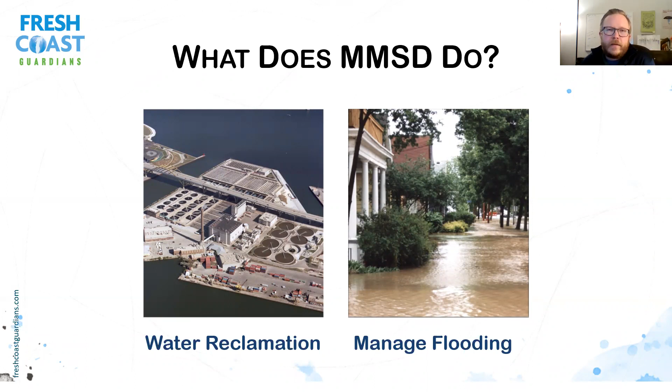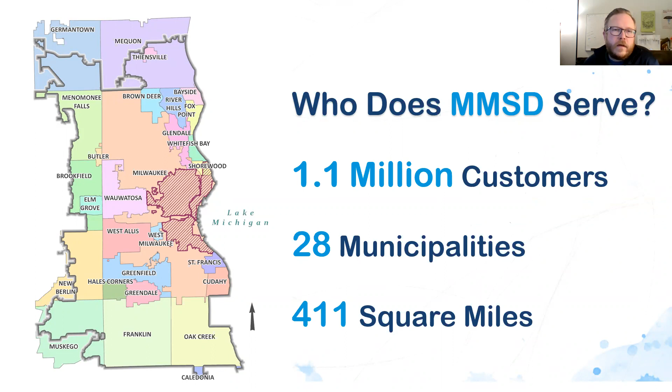We're really world-renowned at how good we are at capturing and cleaning the water. Since 1994, when the deep tunnel went online, we've captured and cleaned 98.5% of the water that's come to us. For perspective, the EPA's goal is 85% capture and clean, so we are well above that. Sadly, many cities in the United States are somewhere around 60 or 65 percent and in much worse shape than us. So this 98.5% is great, and we're really world renowned in that respect, but we'd much rather be closer to 100%. And that's where we'll talk to you about how you can be part of that solution as well.

So first, we're just going to talk about our area, what kind of happens here, and why stormwater and water that falls here is becoming a larger issue, especially with climate change. As you know, we get a lot of rain, sleet, and snow in Milwaukee each year, and that number is continuing to rise each year with climate change.

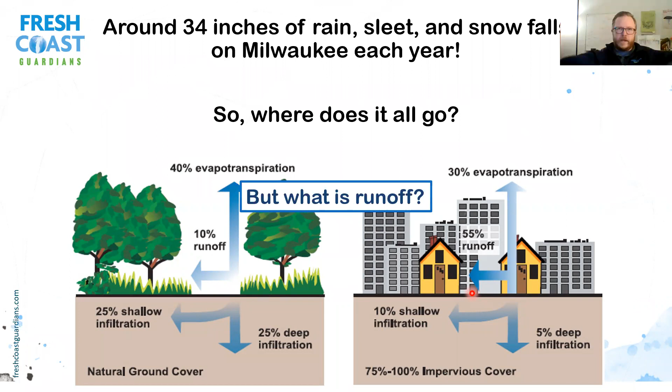That 34 inches that we get has to go somewhere. Obviously in the natural setting you see here on the left, when water falls like in a forest or a prairie, most of the water either goes down into the ground and gets cleaned or evaporates, and very little actually runs off - about 10%. Now in our more urbanized area like Milwaukee, where we've covered up this natural surface with hard surfaces like our roofs and driveways, very little gets into the ground and less evaporates. More than 5 times as much actually runs off right out into the rivers. So that runoff is that sideways motion of water you see when it rains, going down the street. That's what we're talking about when we're talking about runoff - instead of going down into the ground or evaporating, it's going sideways.

Wetlands are uniquely designed to clean water that comes to them. Before we developed, when it rained, water would slowly soak into the ground, come out into rivers, and move slowly through them, getting cleaned by the wetlands. It was nature's perfect treatment plant, doing a great job of cleaning the water.

We thought we could control water with concrete, putting it in concrete channels, and put a lot of the rivers into pipes. Then we developed, and that has really caused issues with increased runoff because the water doesn't have anywhere else to go.

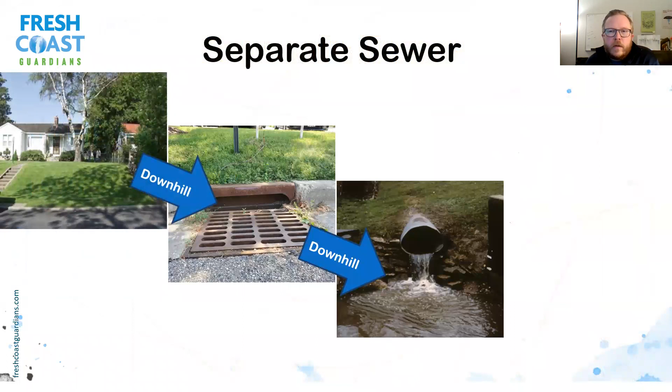When it rains on your lawn and it's saturated and runs, or on your sidewalk, it goes downhill into the street, into storm sewers, which go directly to our rivers and ultimately Lake Michigan, where we play, swim, and also get our drinking water supply.

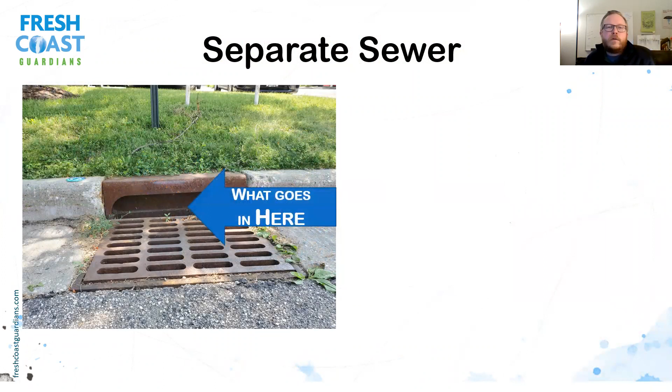So whatever goes in here ends up going directly there, which is our really great resource that we want to protect. It's on the ground, it ends up in our water.

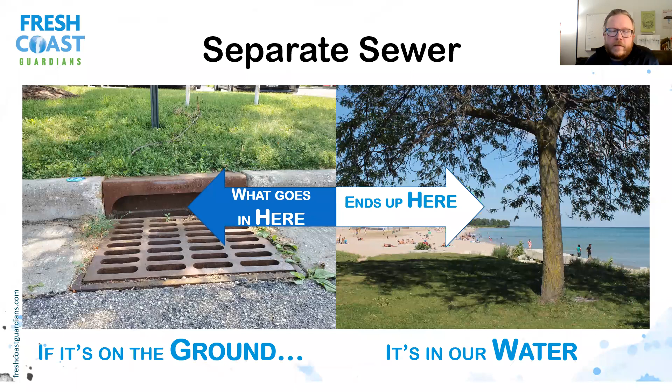Now, what I should have been clear about is that this is the most common way it works in our area—the separate sewer. That's the more modern way of sewers.

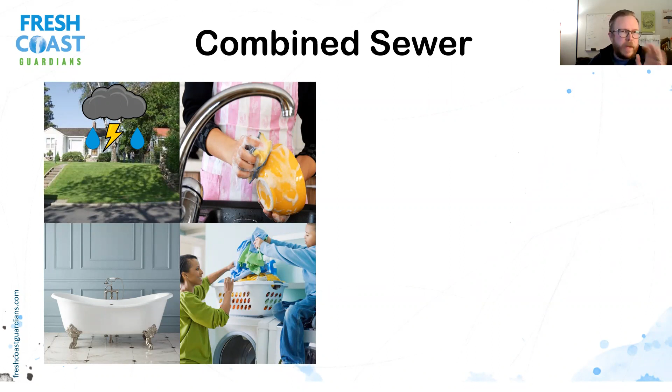There is a small section of our city, Milwaukee and Shorewood, that's in something called the combined sewer. Instead of a separate pipe that goes right to the river with rainwater, the rainwater actually goes in with the sewer water, like wastewater, into one pipe. So washing dishes, bathing, laundry, going to the bathroom—all mix with the rainwater and go into one pipe. That same storm sewer pipe mixes with all the stuff.

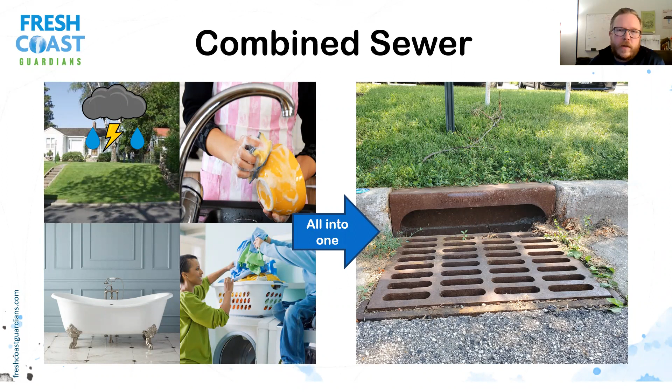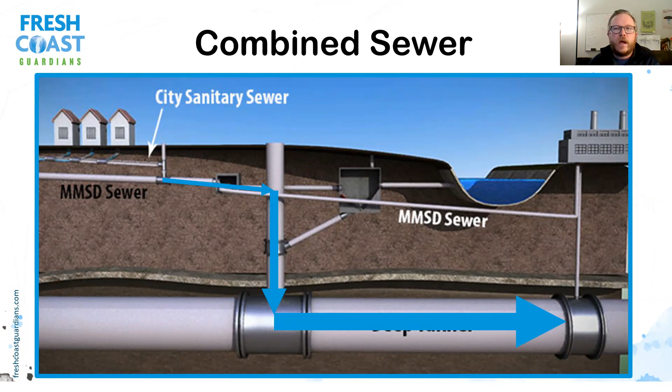That's a smaller area—I'll show you in a second, but it's important to understand. That's where you might have heard of the deep tunnel. The deep tunnel was built as extra storage because when it rains, that section of the sewer system gets overwhelmed. So we can put that extra water into the deep tunnel until the storm passes, then pump it up to treat it.

So where else does the water go? Well, we have sewers, and this is our network here. We own 300 miles of sewers, a nice extensive system that are kind of the big highways of the system. They collect water from the local municipalities who also own sewers—probably the sewer out in your street is owned by the city.

The city system is about 3,000 miles, but another 3,000 miles, probably over that, is owned by you and other homeowners. That pipe between your home and the street, your lateral—if you ever had to roto-root it—is owned by you. In our area, over 3,000 miles of those are privately owned.

I just referenced the combined area—that's this area here in gray or green that I was talking about. That's the combined system, where the rainwater and sewer water mix and go to Jones Island.

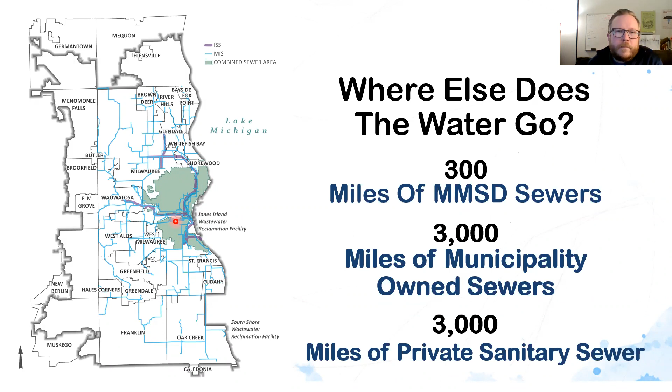So what are some of the consequences? As I mentioned, this water doesn't have a place to go, so it goes sideways. And as we build more and develop more, that increases how much runoff we have.

Well, one of the big problems is the water quickly rushes to the rivers. Some of the rivers we have, I showed you earlier, are in concrete channels where the water gets in there and flows really quickly, causing a health and safety hazard for our community. Many people have unfortunately passed away by trying to jump in these rivers.

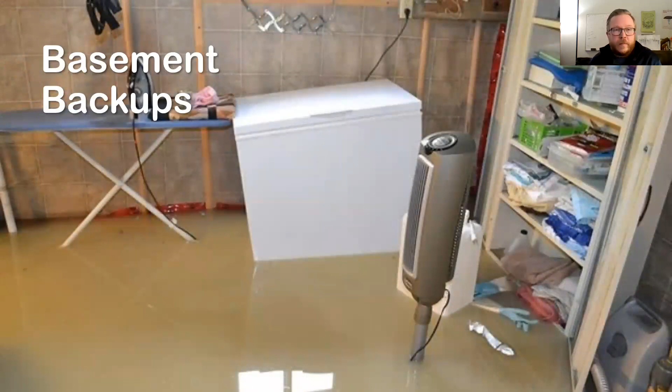Basement backups is another issue. When the sewer system gets overwhelmed too quickly with too much water all at once, you can get basement backups. So those are obviously not a good thing either.

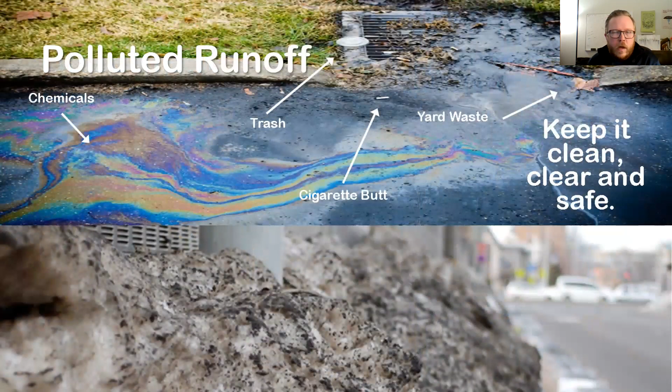Polluted runoff is another big problem. This is actually the number one source of pollution to our waterways, runoff from the streets going directly into the rivers and lakes. In that separate area, anything you see on the ground next to a storm sewer doesn't get cleaned, it goes directly out to the rivers and lake. Just imagine those snowbanks at the end of the season, like right about now, how dirty those are. You can kind of see down here. And imagine that going right out into where we get our drinking water. So not good, and it's the number one source of pollution. We're trying to find ways to make this a better situation than it is.

And lastly, that quick moving water can pick up large things like trees, sediment, and rocks, causing unusual erosion of stream banks that you might have seen along our parkways and things like that. So that's another issue. Okay, that's my part for now.

And I'm gonna pass this on to Lauren to talk about how to make a more resilient home. Thank you very much, Jay. You're welcome. All right, all right.

So taking what we just learned about MMSD, our service area, and what are the consequences, like Jay said, we're going to talk about how you can actually make your home more resilient to help prevent these things. Jay, next slide, please.

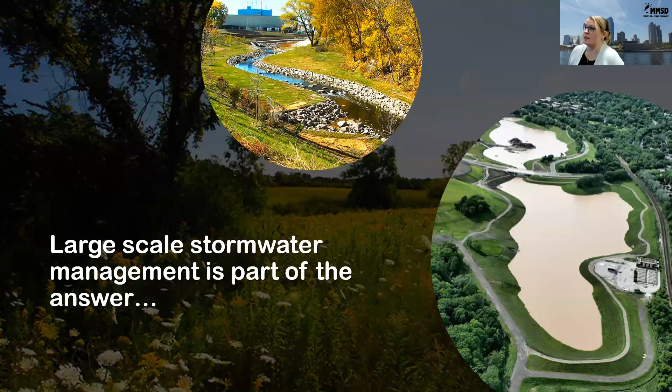Jay touched on this a little bit, but obviously MMSD is contributing to this too. Large-scale stormwater management is a key part of our mission here at MMSD, and something that we do at a watershed scale. These projects are essential for managing large-scale flooding, reducing erosion, improving stream and river health, improving water quality, and reducing demand on our public sewer systems.

Next slide please. You might have seen this coming, but small scale projects are also very key to the success of this. Each practice is key to capturing, cleaning, and keeping that dirty stormwater runoff out of our systems, and from overwhelming our sanitary sewer systems. Jay showed you that map before of what our current southeastern Wisconsin area looks like. In the MMSD service area, over 60 to 70% of our impervious surfaces are on private property. So really the help comes from you, that's where we really need this. There's limited space for these large scale projects, and we really need everyone's help to manage water where it lands.

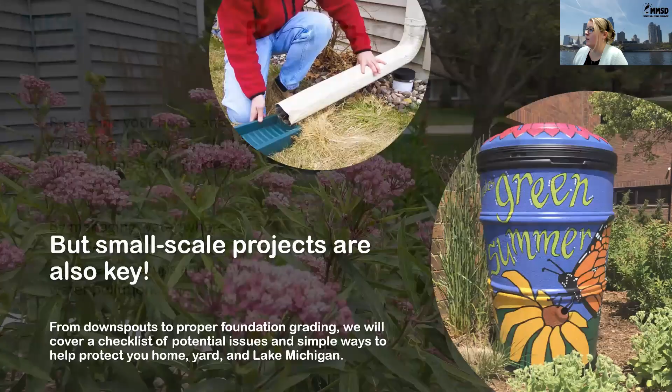So I want to quickly introduce you to our Raincheck program. This was something we rolled out several years ago to help homeowners think of managing their water as a sort of home audit, both inside and out. This checklist is actually on our website, and the format we're going today follows this. We're encouraging homeowners to, a few times a year, go out and really inspect your property and the infrastructure on your property, get to know it. I'd really suggest you do it when it's raining or right after a rain event. That's how you're going to best know where water is moving on your property and see evidence of water inside your home.

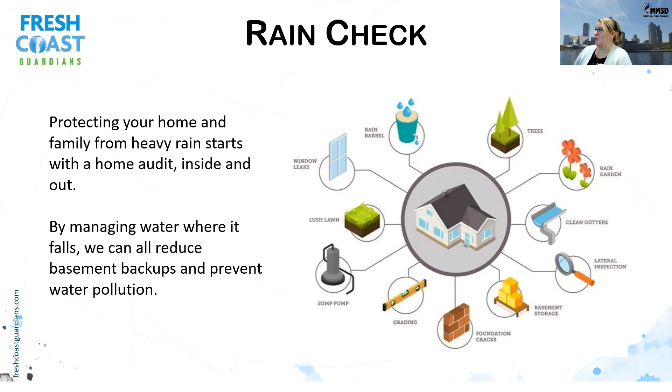Next slide please. The number one priority that we're going to talk about today, there's a lot of great things, but the number one priority for getting water away from your home and reducing the risk of pooling and water seeping into your basement is making sure that the soil and concrete are sloped away from the foundation. This is absolutely key, and something that's actually pretty easy to check.

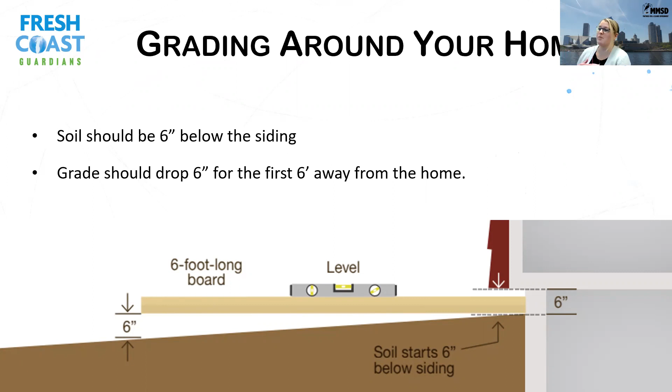I could talk about this a lot more, but I know a lot of people are visual learners like I am, so I'm going to show you a quick video that's going to walk through exactly how to do this on your property. Give us one second here.

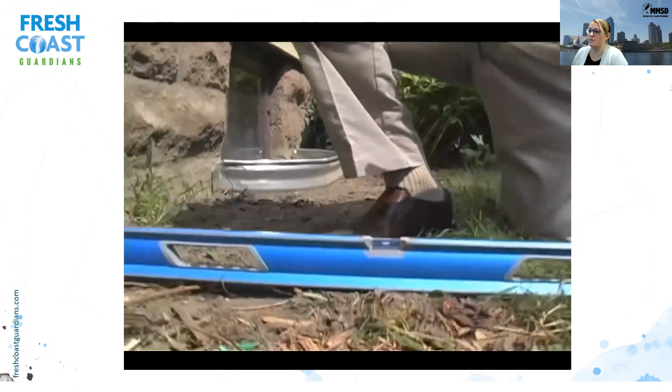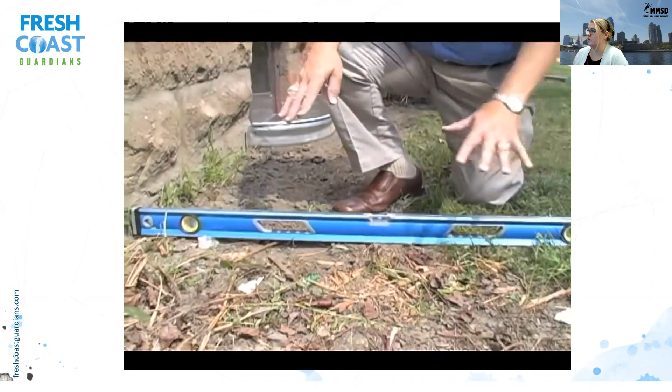The most important thing you can do is keep water away from your house. Whenever it's raining, the water's pouring on your house, it's going to end up someplace. If the ground around your house is pitched toward the house, that means it's just going to funnel it right into the basement. So check the topsoil areas, the planting areas around your house. We put a level down here, and this is just about level. Well, that's not going to help any.

What you're looking for on a ground surface, a soil surface, is a pitch of about 1 inch per foot so water runs away. That means that up here against the wall, it should be about 4 inches higher than it is out at the end of this 4-foot level. And that's what you're looking for.

This means adding soil around the house, build it right up to window wells if necessary. But the point is, make sure that it's pitched away from the house wherever possible. And that means water goes away and not toward your basement.

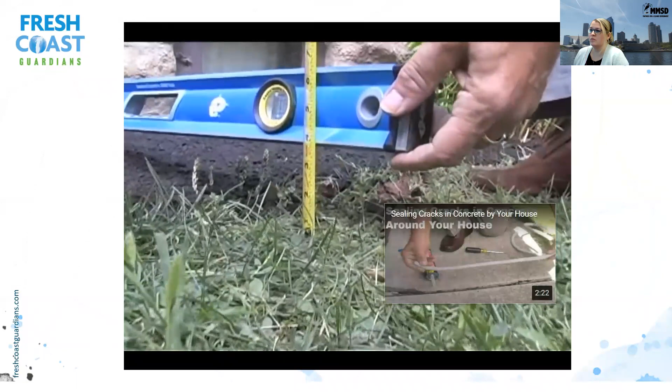Once you've got the dirt around the house raked out, take your level and set it up against the house. Then go to the outside end of the level and lift it up about 4 inches. Now check the bubble in the center of the level. If it's level, that means that you've got a 4-inch pitch over 4 feet, 1 inch per foot. That's exactly what we want.

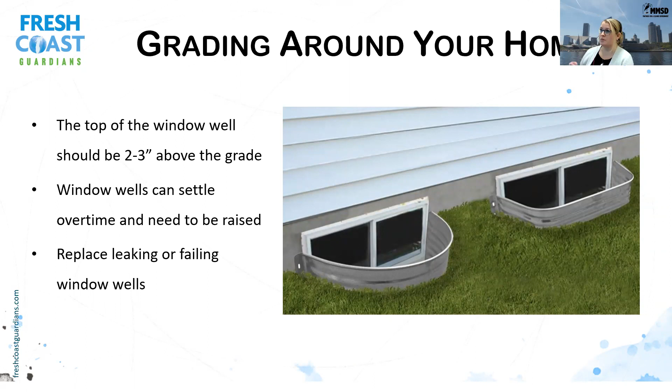So moving inside the home regarding windows, this is a key area where people experience water coming through, and that could be due to shifting of the foundation that has caused cracks there on the frame. It could be due to poor caulking that's just dried out over time and needs to be replaced, or even rotted wood. So this is a good time to do a visual inspection.

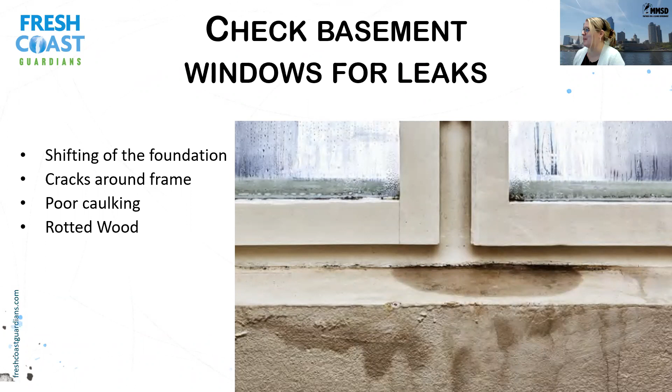Again, I encourage you to go down to your basement during or right after a storm event and look to see if you see any water droplets along there. Maybe you see some moisture on the ground. This would be good evidence that there's water coming in. And again, if it's something as simple as caulking, do that, but it's worth keeping your basement dry. So please replace any failing or seriously leaking windows.

All right, moving on. I would consider this your number 2 priority. We talked about your number 1 priority being proper grading, keeping soil pitched away from your home. Your number 2 priority is maintaining your gutters and your downspouts. These play a really important role in keeping your basement dry, and properly functioning gutters and downspouts direct all of the rain that's coming down on your house and onto your roof away from your foundation and away from your basement.

Some of the common problems that we see in gutters and downspouts are broken, separated, or missing gutters, clogged gutters. If you ever see plants growing in your gutters, you probably have a lot of sediment built up in there that needs to be removed.

Downspouts without extensions, allowing the water to come out of the downspout and immediately start pooling around your foundation. We are going to talk about this more, but you want that to be at least 6 to 10 feet away from your house. And then we've even seen downspouts sloped backwards. It might be obvious, but we really want to make sure that those downspouts are sloping away from your house and not sloping upgrade.

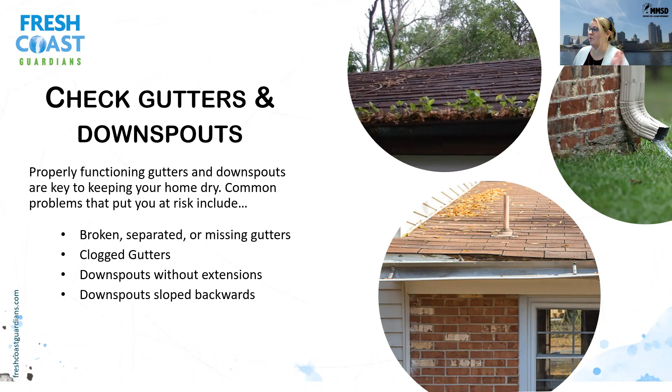So what does proper gutter and downspout maintenance look like? Well, it starts with cleaning your gutters twice a year, ideally in the spring and the fall, and inspecting your gutters and fixing any broken, bent, or separated gutters.

Install your downspout extensions 6 to 10 feet away from your home. I'd encourage you to also look at those connections. A lot of times you're attaching a corrugated plastic piece to an aluminum metal piece, so make sure you're using the right fittings and putting the elbow or downspout into the attachment, because if you do it the other way around, the water will just fall out.

Ensure that your downspouts flow downhill. Right now in winter, especially with spring just around the corner and temperatures starting to go up, clear your downspouts of snow and ice. A lot of times they can get jammed up and there's not a good space for water to safely exit. So go around your house in the next few days and make sure they're free of snow and ice.

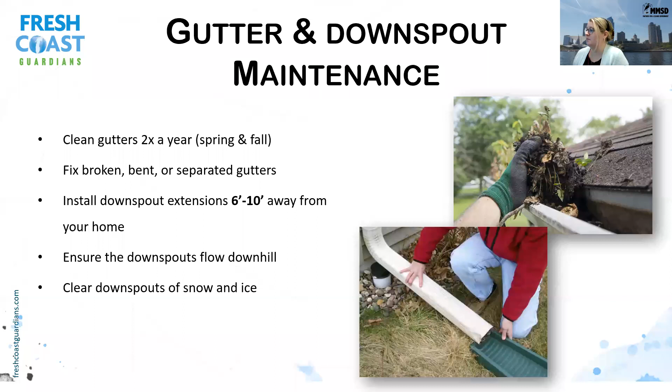The next thing we're going to talk about related to downspouts: if you don't have downspout extensions, it's possible your downspouts are connected to your foundation drains and your sanitary sewer. So why is downspout disconnection important?

During a storm event, if you now have stormwater going out in addition to wastewater, you're putting yourself at risk of a basement backup, and also putting your neighbors at risk. So we highly encourage downspout disconnection.

However, there's one important distinction: whether or not you're in a combined sewer area versus a separate one, and Jay touched on this before. We recommend it in both areas, but you want to make sure you can disconnect safely and have sufficient space to locate that discharge point, at least 6 to 10 feet away from your foundation or basement, with a pervious surface or area that can soak it in, like a lawn or garden, and enough slope to direct discharge away from your home.

Also consider whether it will be a nuisance to your neighbors, or whether that discharge coming out of your downspout could create an icy, unsafe situation. If you're ever unsure, the best plan of action is to call your municipality and ask about downspout disconnection to make sure you can do it safely.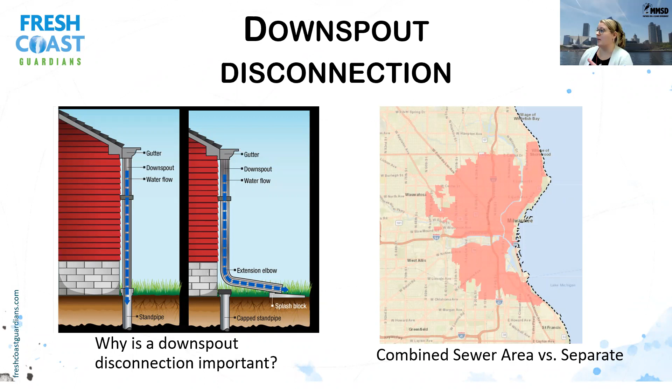All right, so we have a fun little DIY project. If you're saying, that sounds like me, I have ample space to disconnect and I'm ready to do a project, we're going to teach you how to do a downspout disconnect. Step 1 is calling your municipality to find out if you should disconnect. If you're in a separate sewer area, that's less of an issue.

Your next step is to measure 9 inches above the sewer connection and cut it right there with a hacksaw, taking out that bit of your downspout. Then cap the pipe that's connecting to your sewer with a rubber cap and a hose clamp. You can get that at Ace Hardware or other hardware stores.

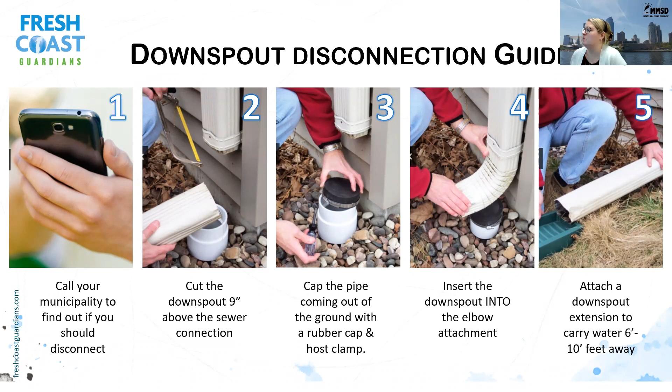The next step is inserting the downspout into the elbow attachment. Again, if you do it the other way around, water will pour out. Lastly, attach a downspout extension to carry that water 6 to 10 feet away from your home. All these instructions are also on our website, along with a lot of other fantastic information about managing water on your property.

Foundation drain disconnection is different from your downspout disconnection. Your foundation drains are a series of pipes along your foundation that collect groundwater and direct it away from your foundation and basement.

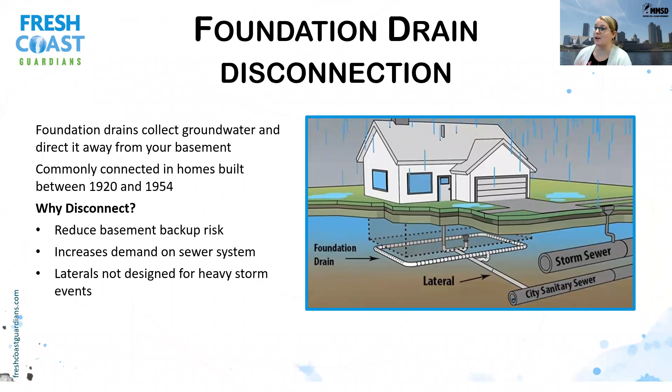In homes built between 1920 and 1954, it's very common to find foundation drains connected to the sanitary sewer lateral. This is a situation where we'd want to disconnect to reduce your risk of a basement backup and reduce that demand on the sewer system. Just a reminder that these laterals are not designed for these heavy storm events.

A lot of people are not aware that their lateral is actually the homeowner's responsibility. When I say lateral, this is the connection that runs from your home and carries the wastewater - all the toilet water you flush, showers, dishes, all that good stuff - and carries it to the main sanitary sewer connection. This picture is an example of a separate sewer connection.

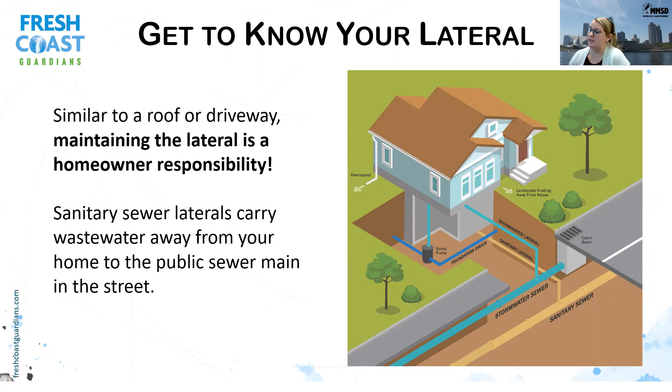And if we were in the combined area, those two pipes, the stormwater and the sanitary, would be combined. Next slide, please. All right, maintain your lateral. So how do I care for this lateral? How do I know that it's in good shape? We're going to start out with 2 rules.

First one is don't pour grease or oils down the drain. This can, even though the water is hot and it may be liquid at that state, once it cools down, it can create solids and massive blocks in your pipe. So never pour grease or oils down the drain, always throw them away.

The next is to only flush the 3 Ps: poop, pee, and paper. I want to emphasize that 'flushable' does not always mean flushable. Anybody's allowed to put that word on their packaging without proving it's actually flushable, so rarely are flushable wipes truly flushable. It's always best to throw them away, because even if it doesn't create a clog in your lateral or in your street, it can create massive problems down the line for your city.

So when is it time to get an inspection? If you're experiencing frequent basement backups to the floor drain, you're seeing debris around your drain during heavy rain events, perhaps you have slow running drains or toilets, or your home is older than 1970 and it's never been inspected, it might be time to consider having your lateral inspected.

This would look like calling a plumber or contractor to come out and do a CCTV, which is a televising of your lateral. During that inspection, they're looking to see if there are any clogs, roots, or cracks in your lateral that might be causing structural issues. Your plumber can point out these issues and discuss repair options with you.

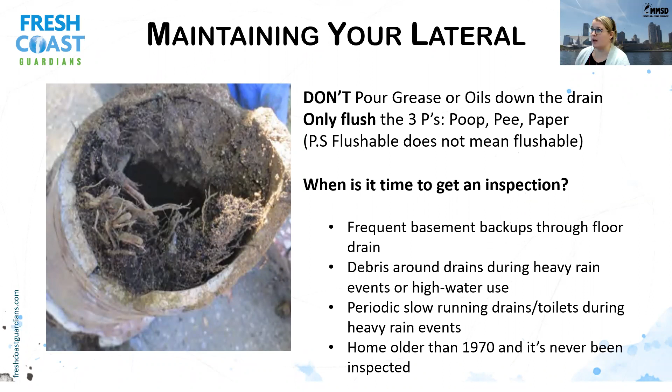All right, lastly, so if you were listening to the last few slides and said, hey, that sounds like something I'm experiencing at my house - I think I need to disconnect my foundation drains, or my drains have been running really slow and I think I might need to get my lateral fixed - I'd like to introduce you to MMSD's new program called Pipecheck.

Pipecheck is a program that provides financial incentives to homeowners to complete sewer projects at a reduced cost. We refer to these as financial incentives - they're a set rate that come off of the total project cost. The goal of Pipecheck is to eliminate these sources of stormwater or groundwater that are entering the system improperly and overwhelming it, putting you at an increased risk of a basement backup.

The Pipecheck program is open to anybody in the MMSD service area and is for 1 or 2 family homes. As part of the program, you must work with a Pipecheck approved contractor. If you're interested in learning more, on our website linked down below, I have a full list of all the financial incentives, our list of approved contractors, and more program requirements. So go there to learn more.

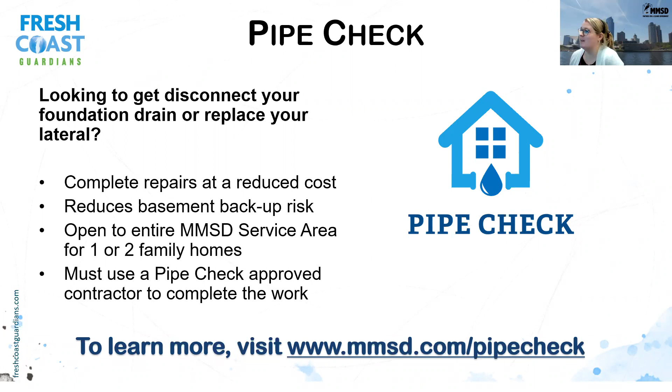All right. Before heading on to the fun part, which is creating a resilient yard, does anybody have any questions about the home part of our program?

Somebody asked how much water gutters collect during a typical rain event. I'll cover that in a bit. It definitely depends on how much it rains, but in a good storm event, you can get like 12 gallons of water every 5 minutes or something. I don't remember the exact number, but I'll cover it in my presentation shortly. It's a lot.

Disconnecting your downspouts alone eliminates a huge portion of that stormwater that could be entering your sanitary sewer lateral. So as far as the sanitary side of things, that's one of the best things you can do to reduce the demand on the system during a storm event.

If there's no more questions, I'm going to let Jay take it over and talk about creating a resilient yard. We've got just one question — Sheldon wants to know, why aren't my window wells a problem?

Why aren't they a problem? Are you experiencing water coming through your window, Sheldon? I guess that would be my first question. If you're not, as long as your window wells are properly sealed, with a cover protecting water from moving over and into your window well during a storm, you should be fine. People normally have gravel in their window wells, so any water that gets in can infiltrate and eventually go into the ground. In a perfect world, those grade level windows aren't ideal, but they're part of your home. So make sure you're inspecting them, checking for cracks, ensuring they're properly sealed, and that you have a good height on your window well cover.

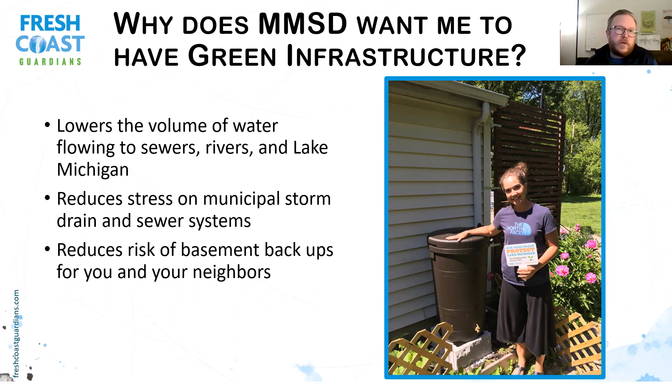Why would MMSD want you to have things like what we call green infrastructure? It's basically things that collect water and manage it on your property. It lowers the volume of water that gets through our sewers, rivers, and ultimately Lake Michigan, reducing stress on the system and helping reduce the risk of basement backups for you and your neighbors. It can also help reduce water pollution if runoff enters the system from the streets.

Some of the things you can do in your yard, we call residential green infrastructure — real technical term — but basically some landscaping options include soil amendments, rain gardens, trees, natural landscaping, and rain barrels. First, I'm going to talk about rain barrels.

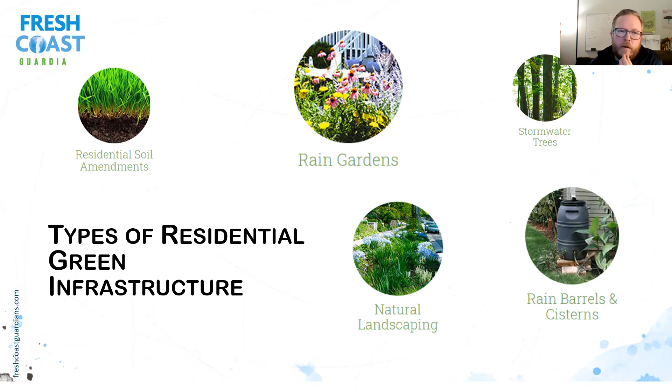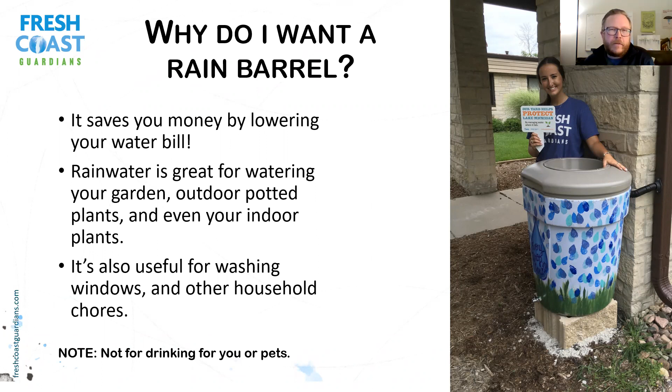Rain barrels are a good way to collect water that comes off your roof and use it for watering your plants and garden. You can also use it for other household chores like washing your car or washing windows. And it's free, which helps you save money on your water bill. One point of emphasis: this water is not for drinking, for you or your pets. It's not a water source for drinking.

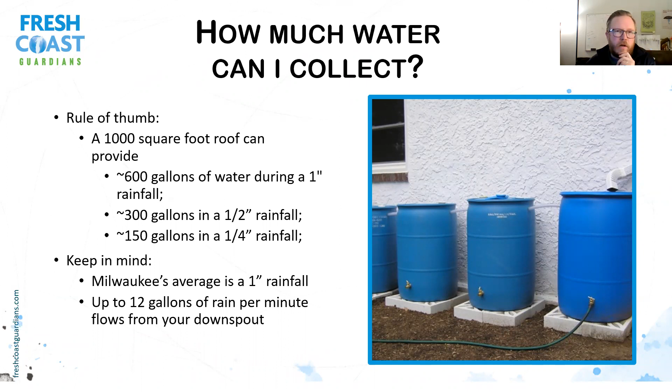So a rain barrel isn't necessarily the solution to all of your problems, but it's something you can do to help reduce how much water gets out into the system and into your yard. It's not going to solve all the issues, but it is a pretty easy process — you just find a good downspout.

You kind of set up your rain barrel next to it, level the ground that it's going to go on, make a good base with either gravel or tamping it down. And then with the rain barrel, the ones that we at least encourage you to use, has all the instructions about how to drill and go in your downspout. It's a little bit more complicated than this, but I'm not going to cover every detail.

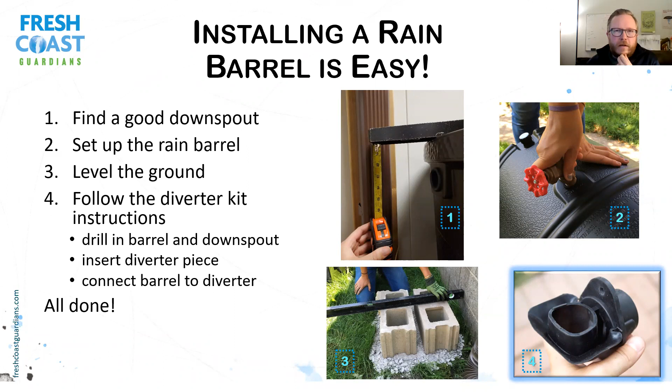So what method is better? On this slide, you see the old school way where people just actually hacked off the downspout and put the water right in the rain barrel. Going back to what I was saying about how much water comes down your downspout, the problem with this style is that when that water is flowing at 12 gallons per minute and then needs to overflow, it can end up overflowing right next to your foundation, which is not what we encourage.

We actually encourage something called a diverter system, where you have a piece that goes into your gutter. Instead of hacking it off, you drill a hole, put this piece in your downspout, and when the rain barrel fills up, the water can go back down your downspout, not next to the rain barrel causing issues next to your foundation. So if you do have one of these old systems, you can talk to us, call us, and figure out how to maybe switch it for a different style.

And you can also just retrofit your rain barrel to have that system work with it. You do need to maintain your rain barrel in the winter. Make sure that you put it away. It shouldn't be sitting there like a big block of ice next to your house. So yes, you should empty it periodically to make sure it doesn't get really stale water.

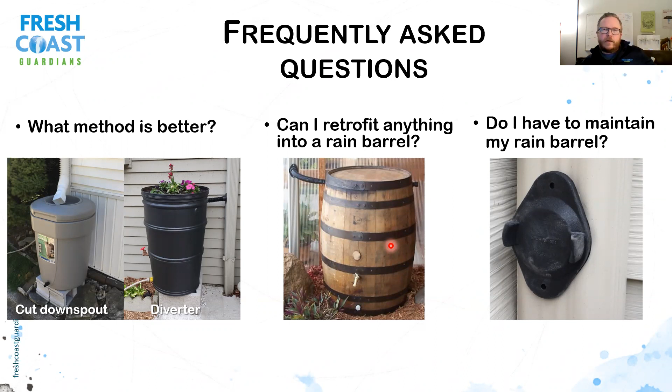All right, next I'm going to talk about rain gardens or natural landscaping. So rain gardens are essentially just an area in your yard where you have your downspout leading to it, or maybe it's the side of your sidewalk or driveway where water flows, and you basically make a garden that can help collect it.

And typically we use native plants or natural perennials. There's a lot of really great benefits to these. It really is a beautiful thing for your yard and neighborhood, with beautiful blooms. It reduces that runoff that we've talked about as an issue, because the plants soak up that water rather than letting it run off, which ultimately reduces the risk of flooding in your neighborhood and other drainage problems, which is a good thing.

And then there's these other co-benefits that are really nice. We obviously are focused on that water, and I'm sure you are too, but there's other benefits that come with it. When you plant native plants, you all of a sudden start getting these cool butterflies that you had never expected to see in your yard, and birds that are also rare. I've had hummingbirds come to my yard, and I live in the city of Milwaukee. It's just so amazing for my kids to be able to see that, which isn't normally the case in an urban lot.

And so the other benefit is that these plants are adapted to the climate, so they're much easier to maintain. Once they're established, you don't need to water them, you don't need to fertilize them, because they're built for this environment. So there's a lot of really great benefits to them.

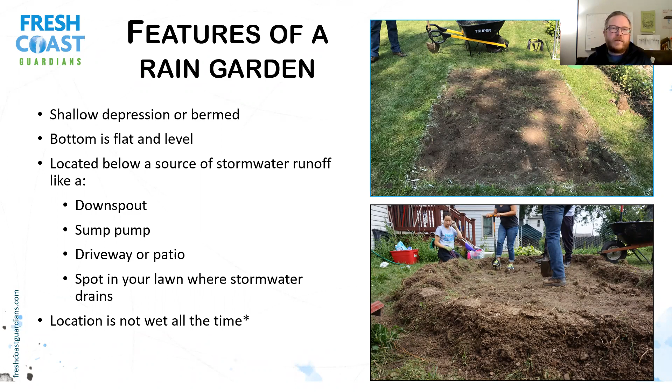But yeah, it's pretty simple. There are some general rules of thumb. You obviously want it near a source of that stormwater, and you want as much sun as possible. The reason I say that is it lets you have more options for plants. Most native plants good for rain gardens like sun. There are some shady plants for shady areas, but they just reduce how many options you have.

You want it to be sure away from your foundation, 6 to 10 feet, and away from your lateral. So that sewer lateral Lauren was referencing earlier, you don't want that right above it, and you don't want to encourage having water right above your lateral.

This is an example of one that complements the existing landscape. Rather than just having a garden out in the middle of your yard, you can connect it to your other planting beds, like is done here, so it doesn't necessarily look like this separate thing.

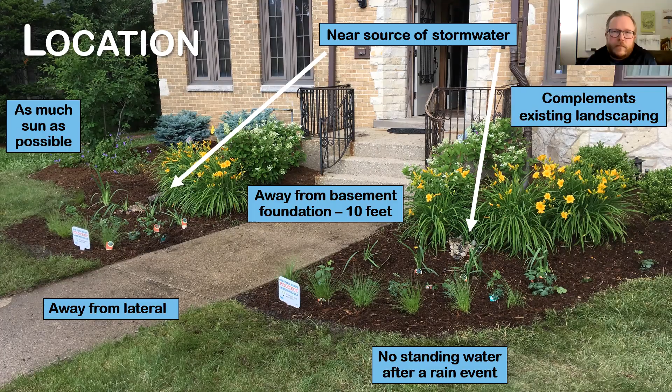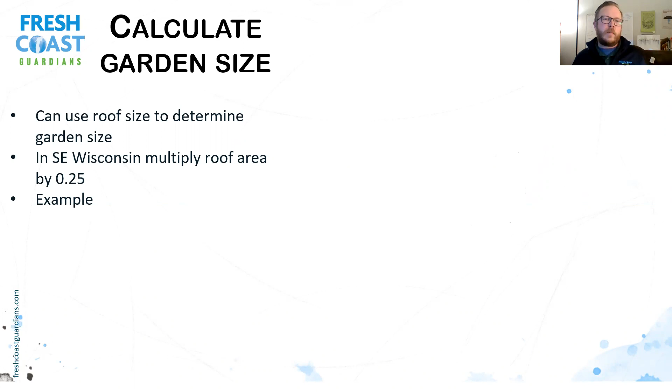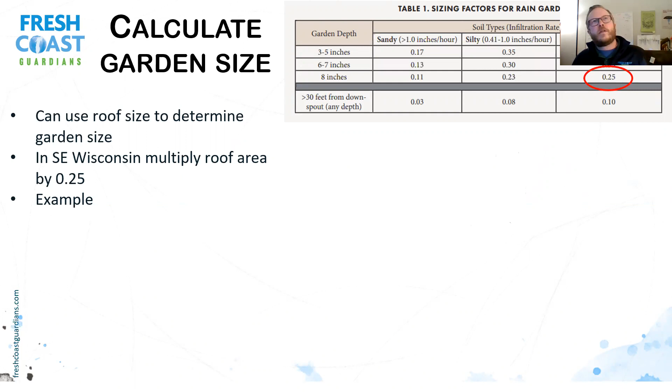To get a little technical, the DNR does have a standard for our clayey soils. To determine how big your rain garden needs to be to capture as much water as possible in a storm, there's a chart in this handout where you get the square footage of your roof that leads to your downspout, and then multiply that by 0.25, or divide by 4.

So for a house here, you can use Google Maps, or just use a tape measure on the ground, looking at what roof goes to that downspout. You measure the length times the width, multiply that - it's about 500 - and then divided by 4, it's around 100 square feet or so.

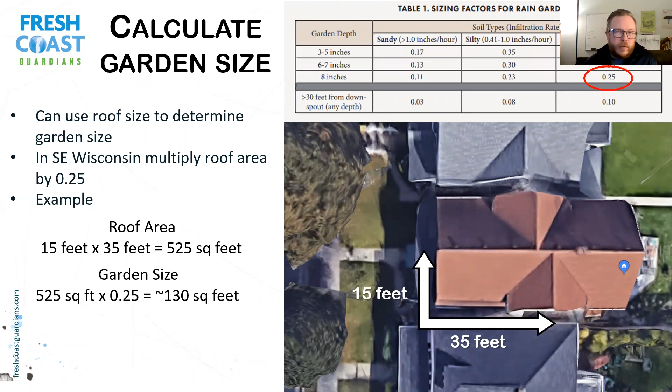I will say this is not an exact science. It depends on how deep you dig it, how many plants you put in. This is just a general rule of thumb. Now, I will say that this is a pretty big garden here for 130 square feet.

But if you already have your downspout going out to your yard and it seems to be handling it okay, anything you do by putting native plants in is going to be better than just turf grass - going back to that diagram I showed you where the turf grass has shallow roots. If you just dig an area and put some native plants in, it's going to soak up a ton more water than turf grass - at least double the amount of water, in my experience with the rain gardens we've put in. So it's really beautiful, it soaks up more water, and it does good for the lake and our water supply.

Another easy thing you could do, even if you're not up for the rain garden or it's not right for your yard, is that area called the boulevard or terrace between the road and the sidewalk. Maybe you've noticed with this meltwater there's ponds where the water is not getting into the ground next to the sidewalk. All you have to do is dig off that turf in the boulevard, lower it a bit, spread that topsoil back somewhere else - maybe along the side of your house to make the pitch better - and then plant low growing native plants there.

One note: if you're not in the city of Milwaukee, you should check with your municipality to make sure this is okay. But the city of Milwaukee typically does not mind if you do this.

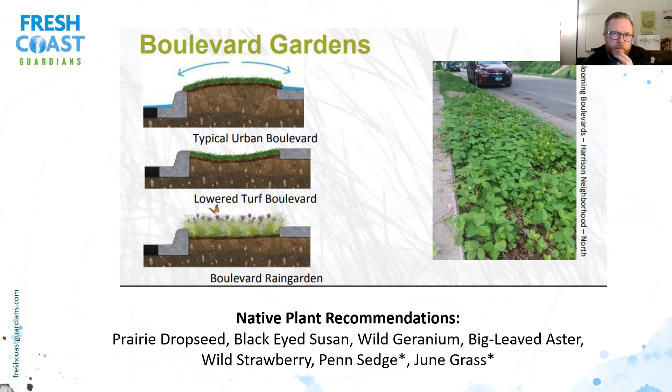Obviously don't dig super deep here. You just dig out the turf and put in your plants. These are some recommendations of plants that can resist some of that salt that comes off the streets: prairie dropseed, black-eyed Susan, wild geranium, and big-leaved aster. And then wild strawberry and Penn sedge. Most of these are offered in a plant sale we have going on now, which I'll reference. But this is another simple thing you can do to help soak up water.

Before you dig a rain garden or something a little deeper, make sure you call Digger's Hotline to confirm you don't have any utilities in the way. Just a note: private utilities, like any electric line to your garage, or an irrigation system, Digger's Hotline does not know where that is. So it's on you to know where your lines are on your own property.

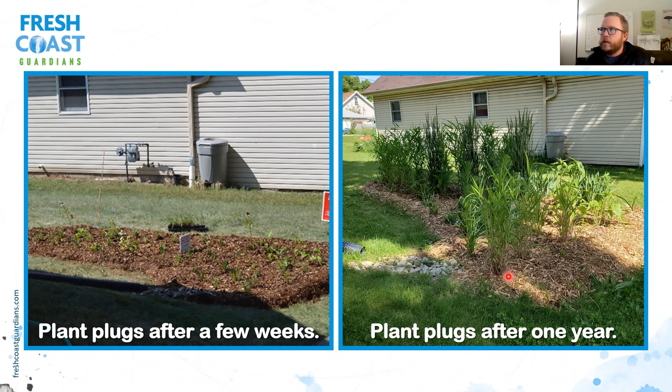All right, so tree planting. If you have a good place in your yard, trees are great for soaking up stormwater and also have co-benefits. Finding the right tree in the right spot can help cool down the effects of the urban heat island in our city. It creates habitat for wildlife, reduces air pollution, gives us oxygen, and is really beautiful. Lots of great things about trees, so we encourage you to look into that if you can — just not right above your lateral.

Lawn care: if you have some area of lawn, there are things you can do to make it more absorbent, which also makes it a healthier, nicer-looking lawn. Cutting your grass at a higher setting allows the roots to grow deeper, become more drought tolerant, and look greener. If you fertilize, use organic fertilizers that soak into the ground and don't run off like synthetic ones — we sell a product called Milorganite at local hardware stores you might be aware of. Aerating your lawn, especially in heavily trafficked areas like where kids play, reduces soil compaction and helps the grass take up more nutrients. Soil amendments are essentially compost spread in a thin layer on your lawn — I've done this a few times and it really helps increase soil health and absorbency. So those are some lawn care tips if you still have lawn you want to maintain.

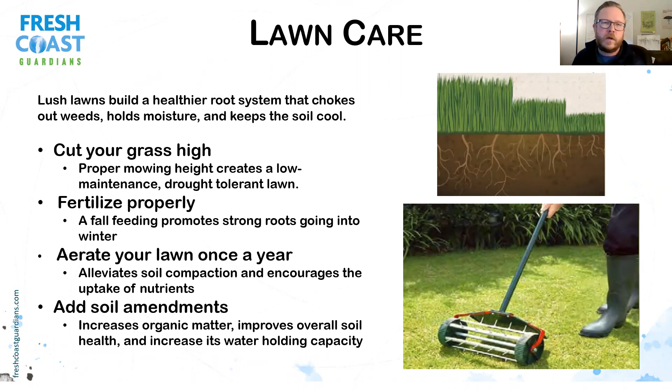I referenced earlier rain gardens and native plants — some of these are tricky to find at local hardware or landscaping stores. There are some in the area, but if you live in the city of Milwaukee, there's not a ton. So we offer a plant sale, open right now — we'll put something in the chat soon. It offers plants for up to 50% off the typical cost of native plants. You order them now through April, then pick them up at MMSD headquarters on June 11th. That's a really great offer.

And other ways you can be a Fresh Coast guardian and help protect the lake and your neighborhood: we have a Fresh Coast Resource Center. So if you have questions after this presentation, or think of them tomorrow, the Fresh Coast Resource Center is here for you.